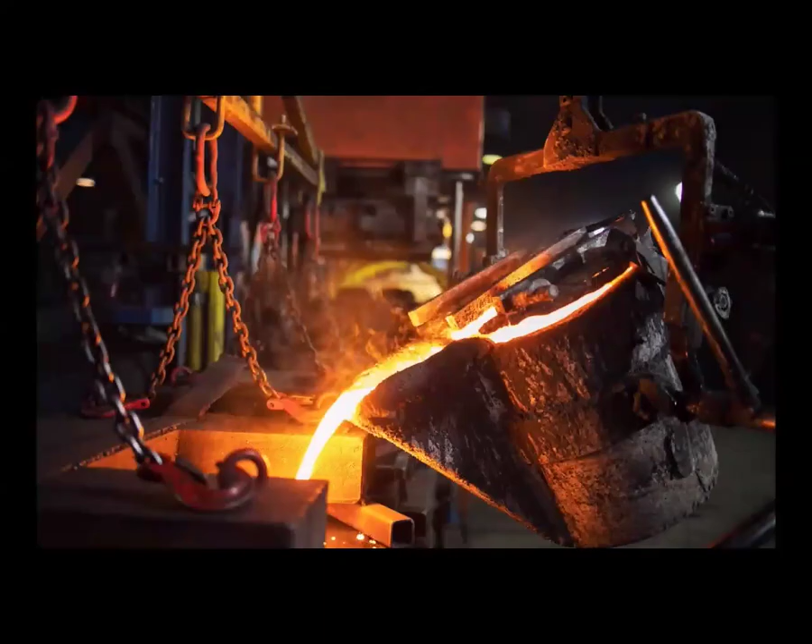Composer John Mackey writes in his foreword to his piece Foundry, quote, "The idea with Foundry was to make a piece that celebrates the fact that percussionists have the ability to make just about anything into an instrument. It won't end up surprising that Foundry for concert band with found percussion, much of it metallic, ends up sounding like a steel factory." Now, this spoke to the uniqueness that I see around me every day at South Dakota Mines.

Here at SDM, the students are extremely smart and driven, but they are also creative and deeply fascinated to learn how things are made and how things work. For our performance, I reached out to some of the classes and professional organizations on campus to see if they could help us create our instruments for this piece.

My first step was to go to our own South Dakota Mines foundry, which houses multiple STEAM groups, including blacksmithing, casting, and welding. The highlight of this experience is when the foundry hosted myself and all of our percussionists to forge our own triangles. None of our current percussionists are metallurgical majors, and so it was a new experience for all of us, learning how to bend and treat metal to produce functional and beautiful sounds.

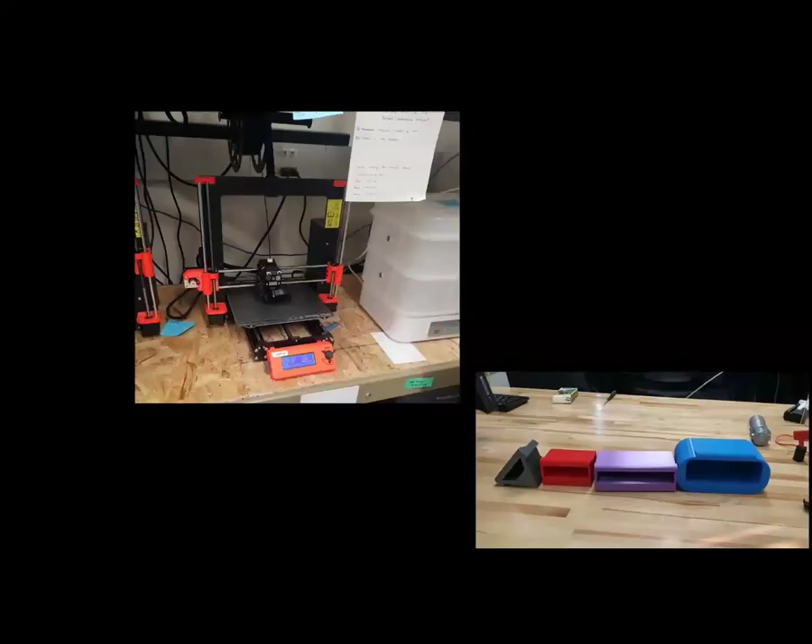We also had diverse teams design our PVC pipe marimba and our 3D printed wood blocks. They all have a love of art and design. Now, is some of this a bit over the top? Yes it is. But I'm so proud of these student-driven design projects, which helped our whole group think about music in new ways.

Similar to the way that continuing to be involved in music and the arts while studying STEM helps students think creatively and innovate new solutions to problems in STEM and problems in our society. Hopefully Mackey would appreciate our version of Foundry, and we hope you enjoy our performance.

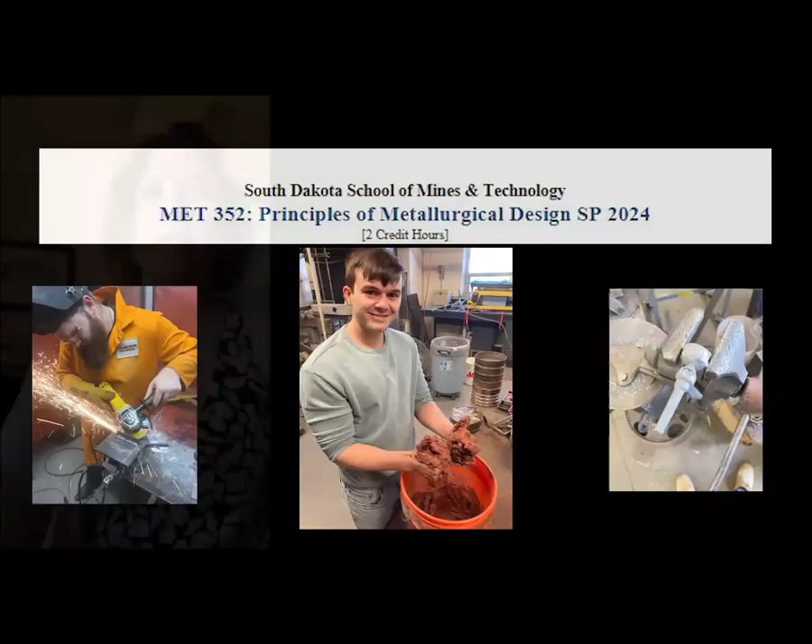At South Dakota Mines, we run on the motto, build it, break it, create it. A perfect example of this is from the spring 2024 Junior Principles of Metallurgical Design course. In this course, students are challenged to use system engineering principles, teamwork, project management skills, technical communications, and material and process selection as they relate to metallurgical engineering, and this semester, as they related to their customer, South Dakota Mines University Band.

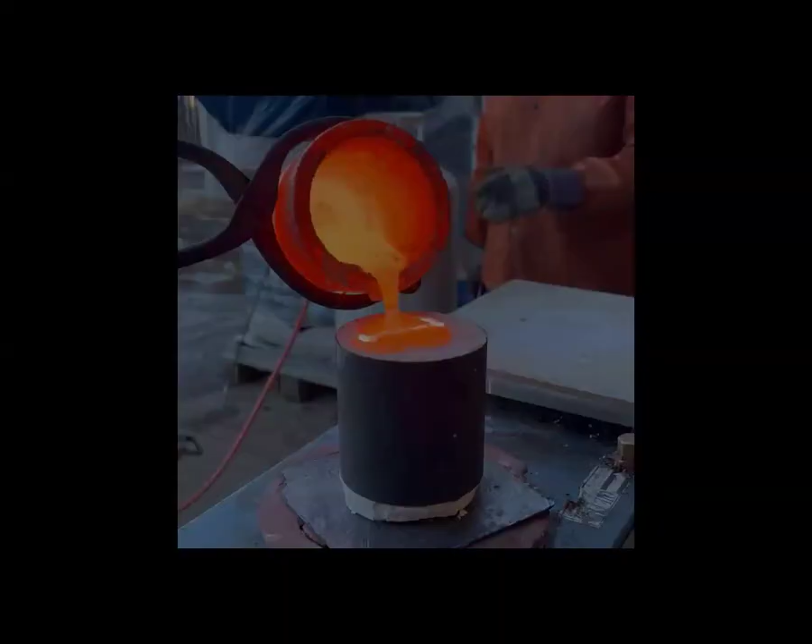5 teams set out to create new instruments for this performance in their assigned medium, either forging, casting, or ceramics. Guided by the faculty advisors, they needed to combine the art of design and creativity with the science of their materials and the methods to deliver a final product for our performance tonight.

There were 2 forging teams. One settled on creating a cymbal, and then the other on a set of chimes. There were 2 casting teams. One created a post horn, and then the other created a set of carillon bells. Then there was 1 ceramics team, and they created 2 traditional drums.

For each project, prototypes and molds were created and materials were tested. For the post horn team, they only used recycled materials. And for the ceramics drum team, they created their bowls out of Black Hills clay they gathered themselves off of Tower Road. Now, this project wasn't without its challenges. Air conditioners destroyed curing clay. Casted metal had a mind of its own.

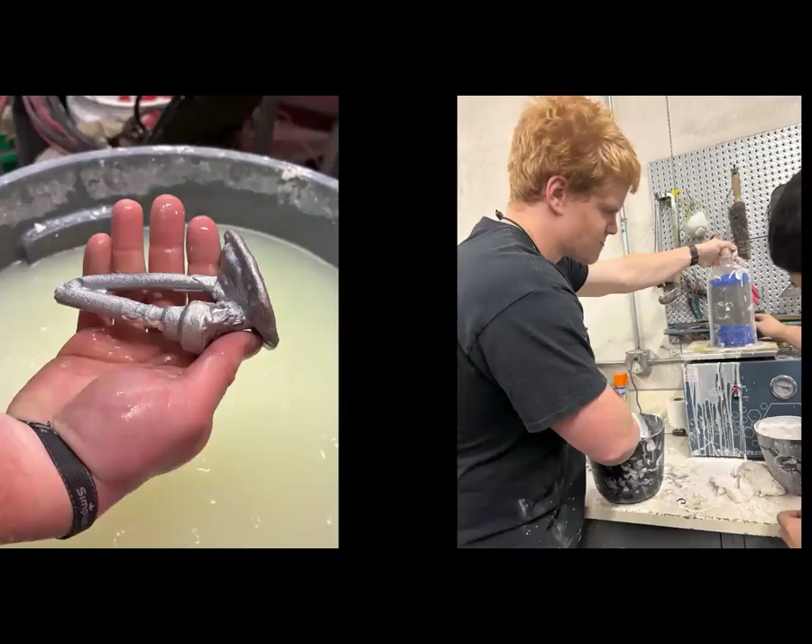And luckily, these students took their jobs seriously, testing materials, creating safe environments. We are happy to report that all teams were successful in creating a product that then was explored and manipulated by the musicians performing tonight. This was true teamwork from creator to performer. It is amazing what our students can accomplish, and we hope you enjoy hearing these new instruments on our performance of Randall Standridge's Celebration Tribalesque.

All right, so that was 2024, and then this spring, we did it again. So I'm going to turn it over to Dr. Donovan to talk about what happened this semester.

Thank you, Dr. Armstrong. And I think on her slide, she should have been much higher up there. She's a pretty key component of this. The students are always going in asking questions, so we're very fortunate that we've been able to work with her.

I might stand on that side. That seems less echoey. Is that less echo? No. Let's do that. Is that better? Awesome. Yeah, I couldn't have listened to me through that either.

Once again, thank you, Dr. Armstrong. We are really fortunate that we've been able to work with her the last 2 years. It's been so fun, and the students have had the opportunity to have a different perspective looking at a problem. And I really wanted to shout out all the different instruments we've made this year. I don't have the time to talk about all of them. I'm going to be talking about 2: the ceramic flute and then the glockenspiel, but there were a lot of really cool projects that the students did, and I'll dive right in.

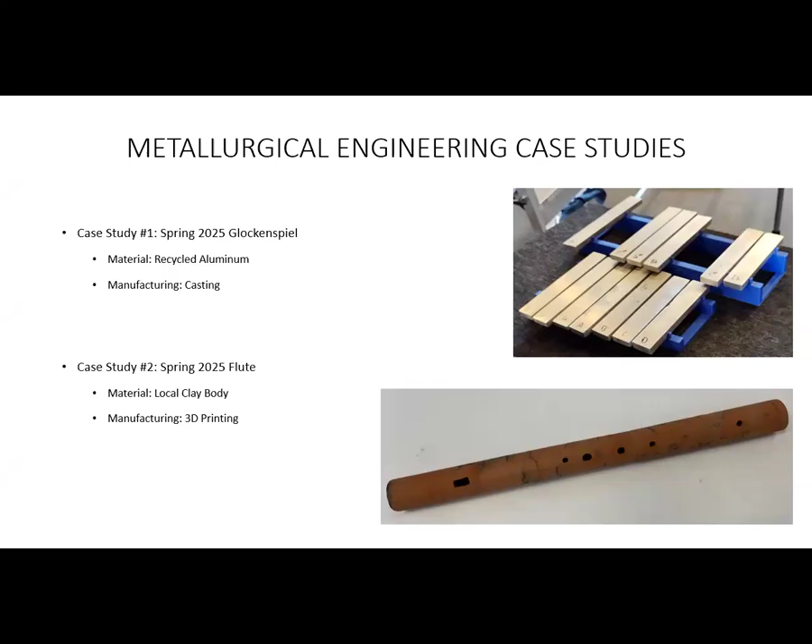So when we start with the design project in metallurgical design, we start with a problem statement. This first one we'll do is the glockenspiel. The problem statement is similar, if you're more familiar with science, to a research hypothesis. In engineering, we start with a problem statement. Engineers, we're problem solvers, so defining the problem or what we're going to do is really where we start, and that's what this group did.

So the glockenspiel is actually this one right here. They designed and produced 13 glockenspiel keys. They went through a casting process, and then there were a couple different songs this year they could design their instrument to align with. This one specifically went with Roma, and there were 13 keys that they made. As you notice, there's not 13 keys. The other half of it's in a display.

I should also say, as I go through these slides, you might start noticing there's 2 different slide decks. It's because these are all student slides that I'm presenting. So you'll be as surprised as I am with each slide. No, but I really wanted to shout out the students. These are all student slides. I didn't modify them. I'm just helping tell their story.

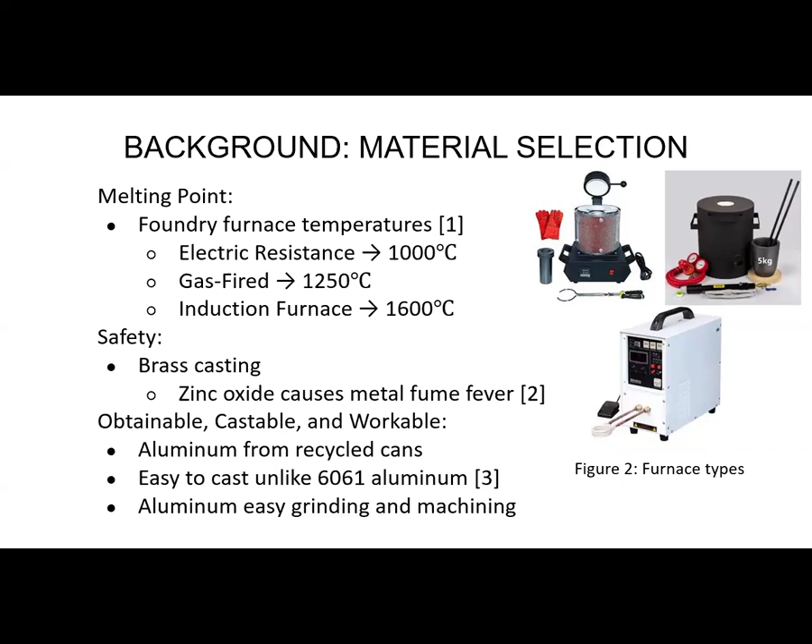The aluminum they used is from recycled cans. Of course, I joked, college students, recycled cans. If it was my era, it would have been one type of soda cans. I was very surprised. I went and looked at the cans they had. These kids are Monster drinkers. These are energy drinks. There was a lot of Monster cans that went into the making of those glockenspiels. But they stuck with the same can design throughout, melted them down for this. So just some considerations they had during this process.

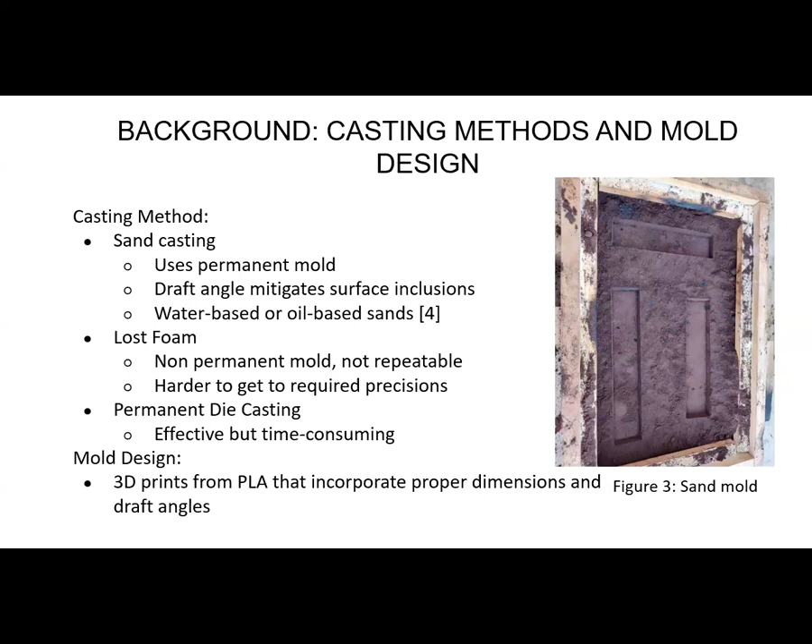The construction for this, they're rectangular bars, as you can see right there, generally made from steel. Steel has a higher melting point than aluminum. In aluminum, we really wanted to keep this recycled sustainability component, so they stuck with aluminum, but could learn from what was done with steel here. And then the harmonics, I'll get into those a little bit later, but they wanted to keep those in mind.

So frequency is directly proportional to the thickness, and then it has an inverse squared relationship with the length. So if you want to change sound, and we'll get a little bit more specific, you can either trim off the edges or trim through the thickness of it. And by trim, I mean grind down.

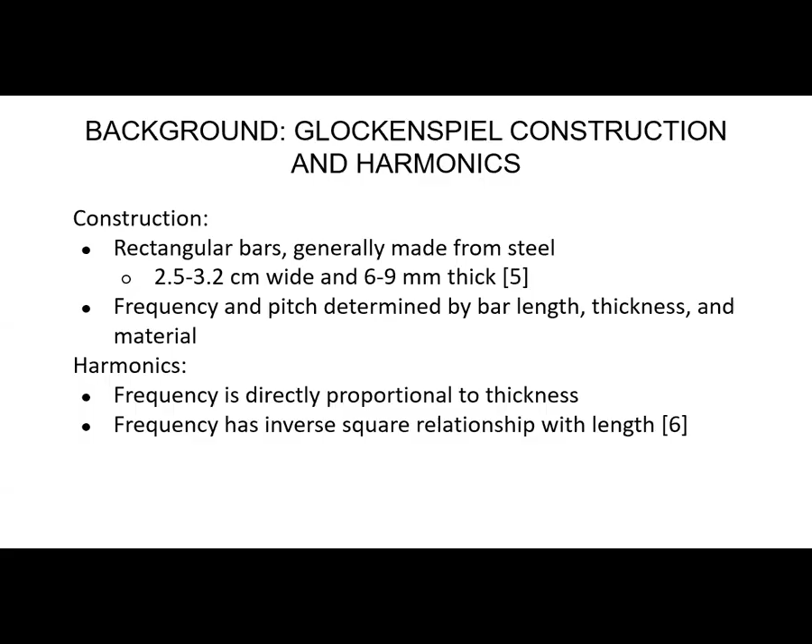So here's design requirements. This is a really important part of design, is being very specific on what our customer needs. So in this case, their requirement was the ability to tune keys. They selected 13 keys, that was their goal. Must be loud enough to be heard by the audience. It's kind of important. If we can play it and only I can hear it, it's not a very useful instrument for Dr. Armstrong. Bars must be machinable.

That's a big one. When we're doing a lot of casting, there's often what we call post-processing. So it's not like it comes out perfect. We have to do things afterwards to get it to an appealing look, or maybe even to get to the sound we want. So the machinability is a very important part. And then the other requirement was it must be able to be played by a percussionist. Once again, if the percussionist can't play it, it's not very useful for Dr. Armstrong.

One other thing we really walk through with the students is we as humans might have gut feeling. Gut feeling is not very quantitative. As engineers, we try and quantify that as much as possible. So here, what we have is what we call a trade study. We'll just stick with table 2. You can read the bottom one, but I'll walk through a table 2 example. It's the casting method trade study. So they have the different types: sand casting, investment, lost foam casting, permanent die casting. And then they looked at a variety of different things: porosity, impurities, mold design, repeatability, cycle time, post-processing.

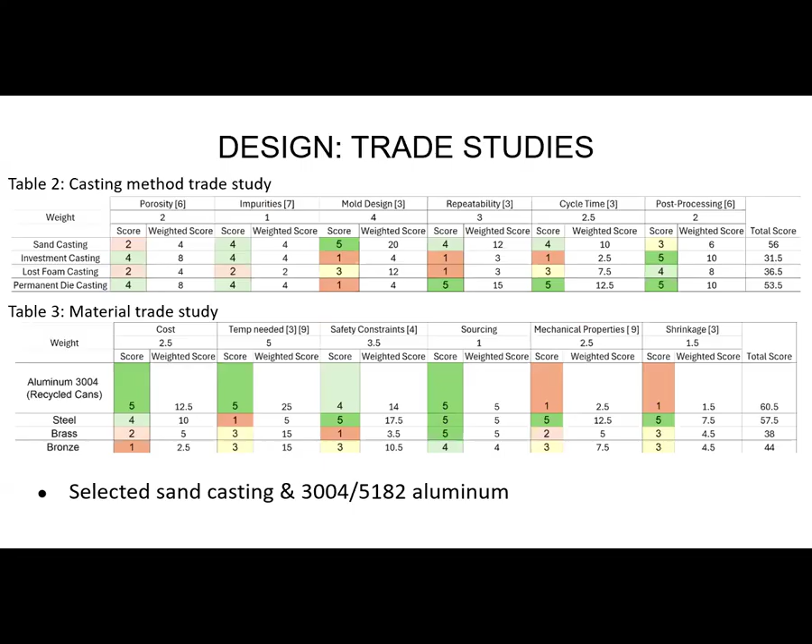Another framework we give students is a flow. Where are we starting? Where are we going? I think one of the most important parts of engineering is that feedback loop, and you can see a couple different ones here.

With this particular one, they started here with the CAD pattern design, and they worked left to right. And when we got to the sand mold construction, they did a melting and cast. So they melted their metal, casted it. They had a bad cast. They needed to go back and redo that. If it was fine, we went to machining, and then did testing and tuning.

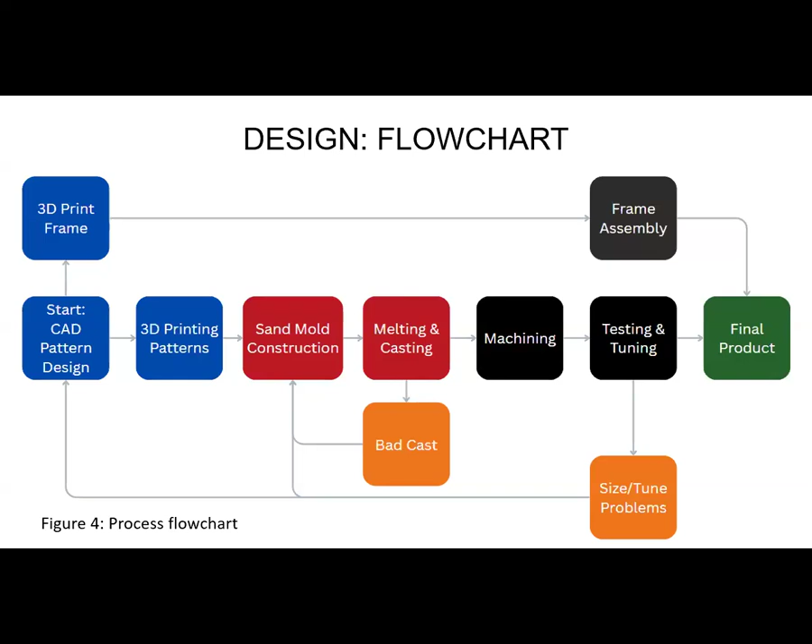With the testing and tuning, if it wasn't the way we wanted it or needed it, we might have gone back to the sand mold construction, or we might have tuned it and put it back in. But as you can see, there are these different loops in the process, and we'll show you some examples of those. Once we got past that, you get to the final product. For the tuning and testing, they often use a lot of different apps, either on your phone or Dr. Armstrong had ones they could use.

Safety, I kind of talked about that a little bit earlier. We pulled these slides, they didn't come through clean. This says design safety. Some of the things to keep in mind: molten metals. The molten metals they were dealing with were above 600 degrees Celsius, so they're quite warm. We have flammable gases that we need to consider, hot tools, and then also toxic gases if you're working with like brass, so zinc can come off, lead, those are all issues. They didn't have that, they were working with an aluminum, but as you can see, they're still in PPE, personal protective equipment, and they're not having any fun.

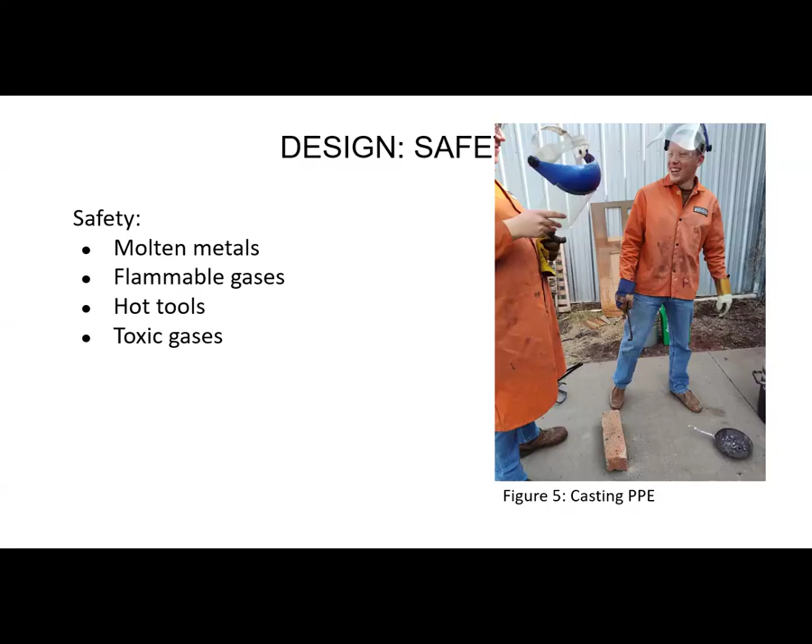They were totally miserable, not having any fun at all. No, I think the funnest part was just to see the groups get together and really get to interact in a hands-on way. So they had a good time with a lot of these. There were struggles, but definitely had a good time along the way.

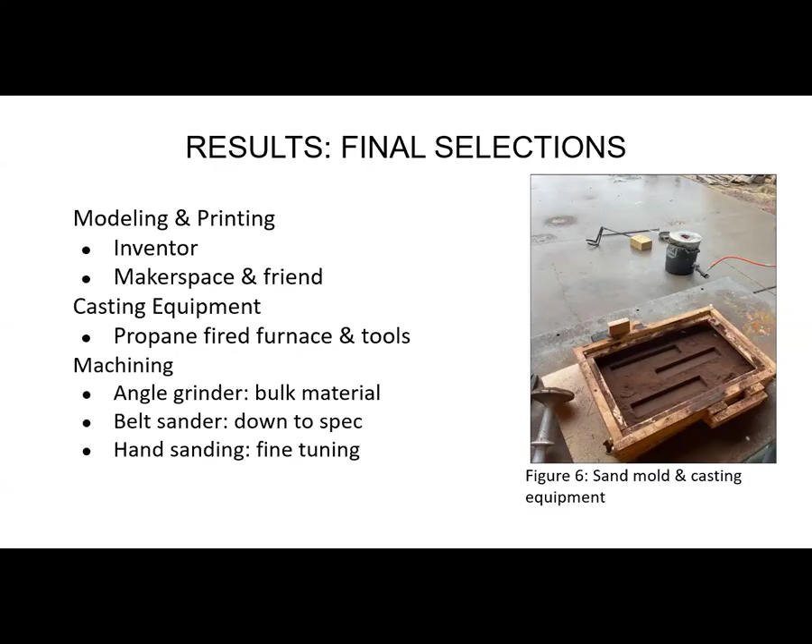In terms of the tuning, I kind of talked about this a little bit. There's a couple different tuning apps. Dr. Armstrong has equipment you can use as well to tune. But for the glockenspiel, this is actually, I think, modified off of a xylophone, a very similar instrument, which was where this literature came from. But you can see here, if we remove material from this end or this end, it will sharpen both the fundamental and the overtone. And then if we remove from the middle, so not shaving off the sides, but from that more center, it will flatten out the fundamental note.

So what that means, lower thickness, lower tune, lower length, higher tune. And so the students were able to do 13 different notes with this and get within 3 cents accuracy. So I'm told that's really impressive.

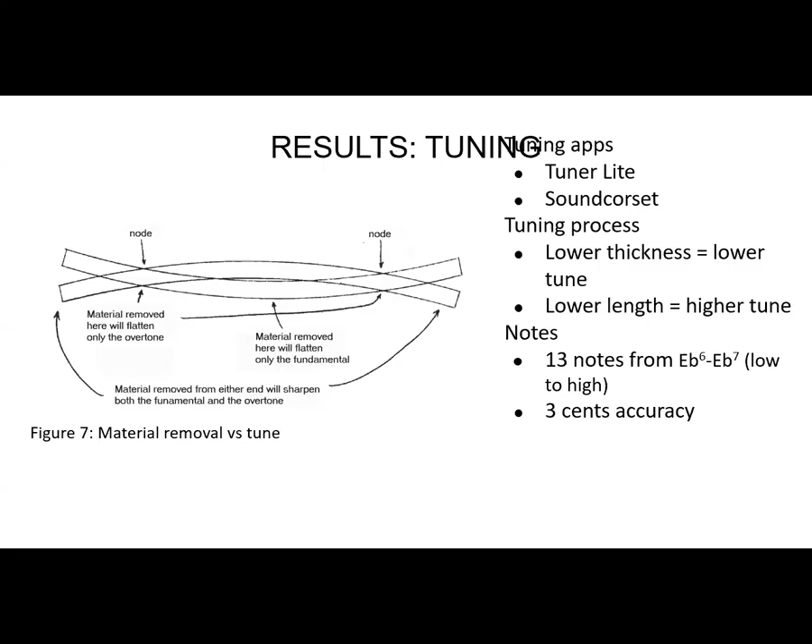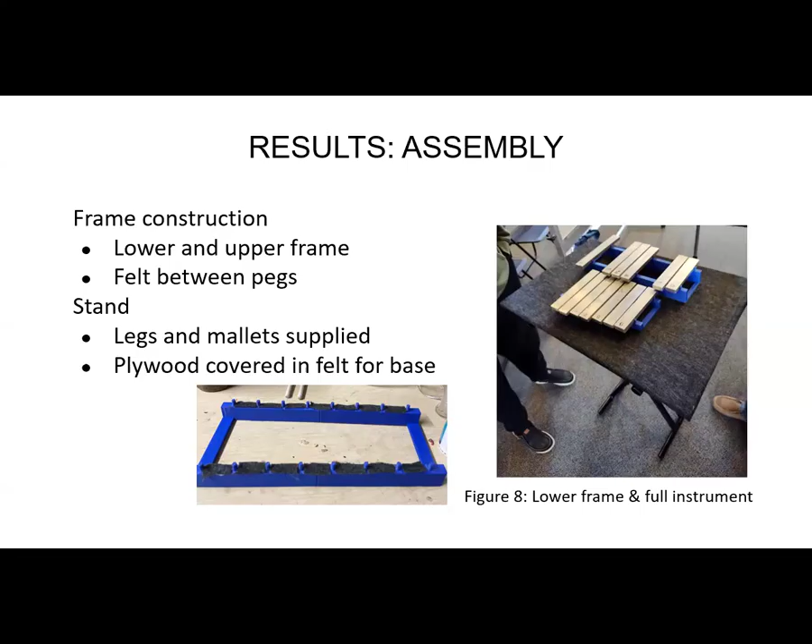One of the big parts of this is, for example, I'll pick on this gong. I know I'm not talking about the gong, but it's probably easy to make a gong, but that's not good enough. If we just hand Dr. Armstrong a gong, she's then got to build a stand for it. So part of it is it's not just making it, it's making it functional and useful and actually helping that whole process. So making it wasn't sufficient. It had to be made and functional to completeness, so we could hand it off.

So some results are the property tests that we did. So for this group, they did 4 different tests. They went and looked at composition. So they used X-ray fluorescence to do that, and that's what we see here. So a big portion of their aluminum was, as you'd imagine, aluminum. It was 90%. But you can see some other things in there, some magnesium, a little bit of copper. But for the most part, it's aluminum as we anticipated with using an aluminum can. And then we did see a slightly high silicon content and then just some references they had.

They also did hardness testing on these, so Rockwell B test, and they got 59.4 and 48.2. I think in a slide or two, I'll talk about that. And those, we were really looking at mallet strike zones. So there's different parts that the mallet hits as well.

They also did a drop test. So if they drop it, we don't want it to shatter. Not that we'd worry about that with metal; we did have other instruments where that was a concern. But they did drop it from 5 feet high, and they only got a small dent. So even if something happened during transport, we were probably okay.

Porosity, that was a huge one that the students wanted to go and investigate. We have creative students, but we also have curious students. And so with the porosity, I remember this group really wanted to go and investigate that. And part of design is, we've got a product. That's a great question for a scientist or maybe a summer project, but they did a really good job on really asking a lot of good questions and identifying things that could be fixed in the future.

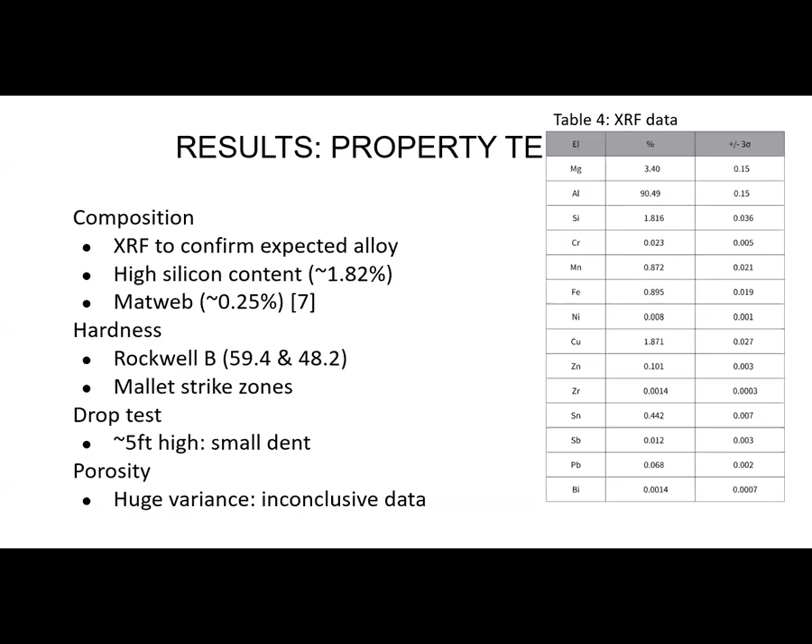Part of being an engineer and solving a problem is also saying, how can I improve upon problems that exist? So they really wanted to dive into that. We calmed them down a little bit, but it was kind of a fun path they almost went on. Some challenges they really did have: broken bars, that's pretty common sometimes with a cast.

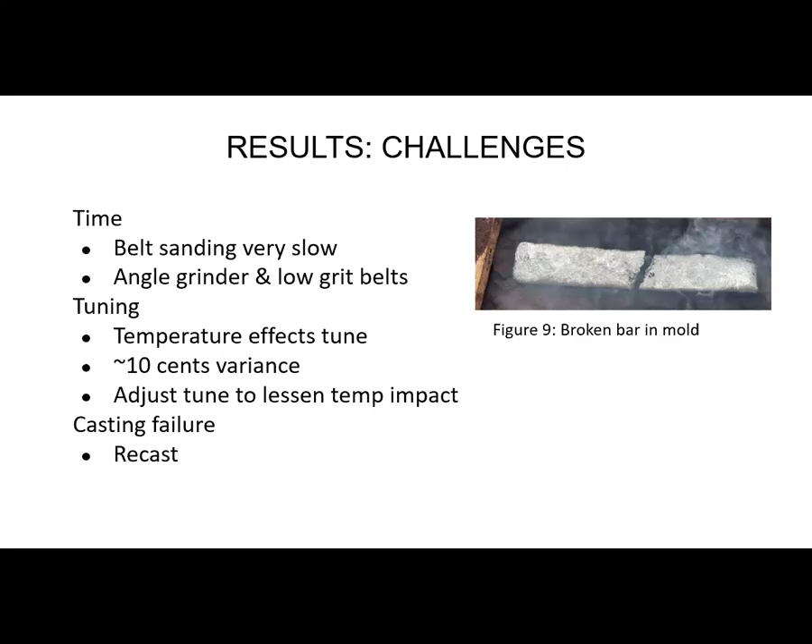Time: the belt sanding was a very slow process for them, as well as the angle grinding and the low grit belts. And then tuning: we see temperature affects the tune. We saw a 10-cent variance, and then they had to work on adjusting the tune. And then, like with this one, there were a couple recasts they had to do. So 13 keys was pretty ambitious.

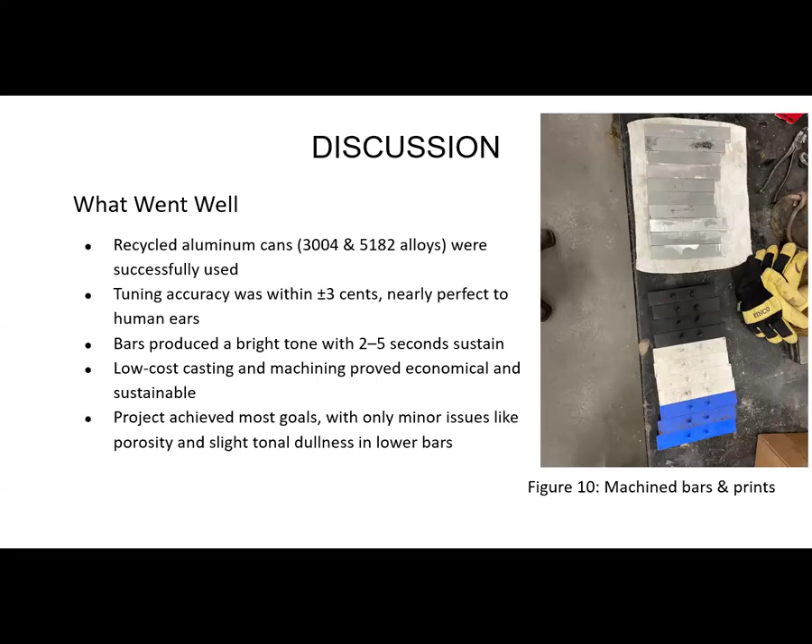I'm just going to go through this at a high level. They went through some discussion about different recycled cans, tuning, and then the different tones the bars could produce. And one of the big things a lot of these teams kept in mind was low-cost casting and machining, so what's around that we can already use in a sustainable way. And some recommendations. I'm not going to go through all of them, but that is another thing as an engineer: what is that next thing we can improve upon for that next cycle?

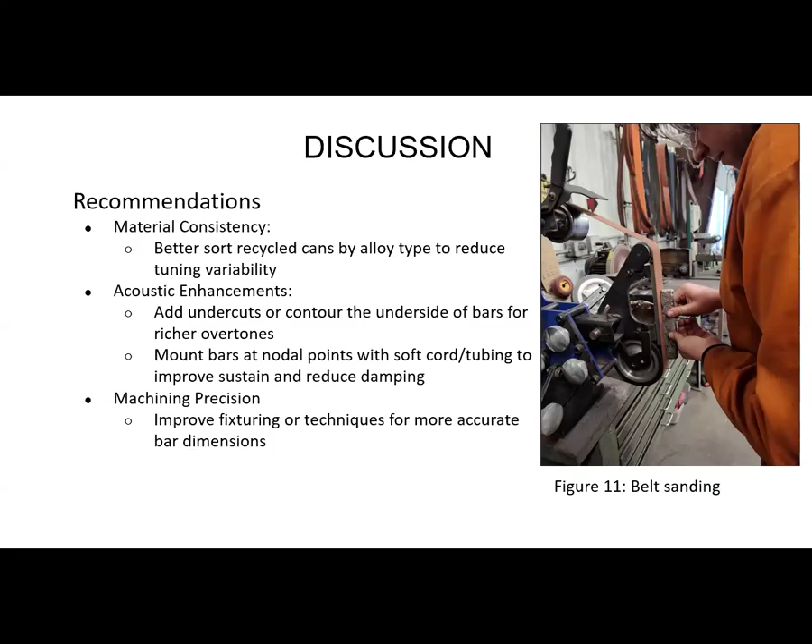To be clear, this is a lot. We give them 15 weeks in a semester, and part of that is just learning engineering design, getting these terms: what is a problem statement, a constraint. There's all of this in this whole time. Some of the students have never cast before, so they're learning this whole manufacturing process. And we're grateful we have Dr. Armstrong, but we're also learning music a little bit along the way too. So there's a lot of moving parts in there.

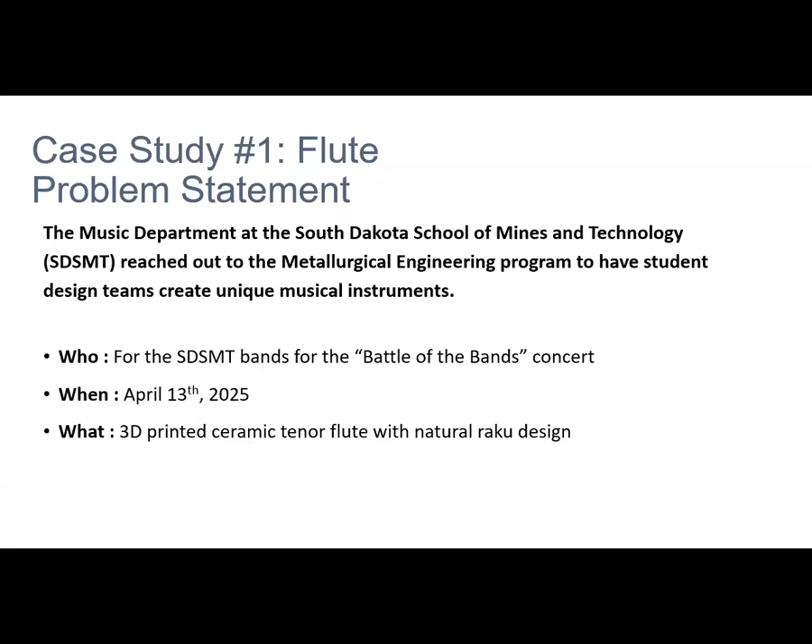The next one I'm going to jump to is the flute. They also start out with that problem statement. We like to identify who, when, what, and they also have the requirements and then also some restrictions. Restrictions, like I said, you can think of as constraints. I'm going to go through some of the traditional engineering stuff a little faster because I talked about it already. But this group was with the flute, which is right there. I guess I should have you play it, huh?

So this group, they made a flute. They also made the mutes that you might see. Almost. It is a weird mouthpiece. It was the first 3D printed one we had with clay. So it's kind of... yeah, there's a mouth. We did add a piece to the mouth part of that to help it.

But they started with 100% local minerals. So they went to a place, it's our little hidey spot, where we found a pretty good clay body that works geologically. So they had to mine it. They then took it and dried it. They went through a grinding and a sizing process. They did what's called XRD.

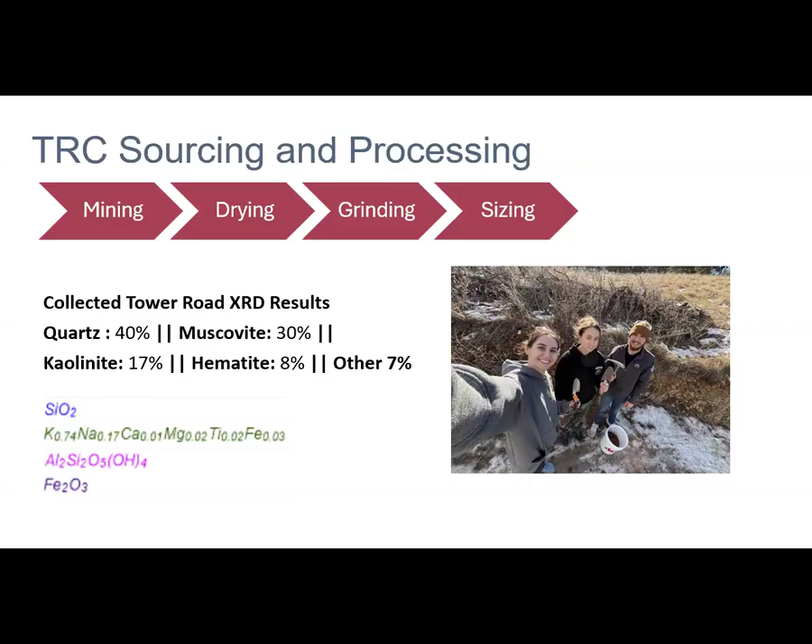So XRD is X-ray diffraction. You can take a mineral, hit it with an X-ray, and the way it diffracts can give you information about what minerals are in there. And it'll also show you, like here with quartz, the percentage of them. So from XRD, they could formulate a clay body that they could then 3D print. And here's their flow chart.

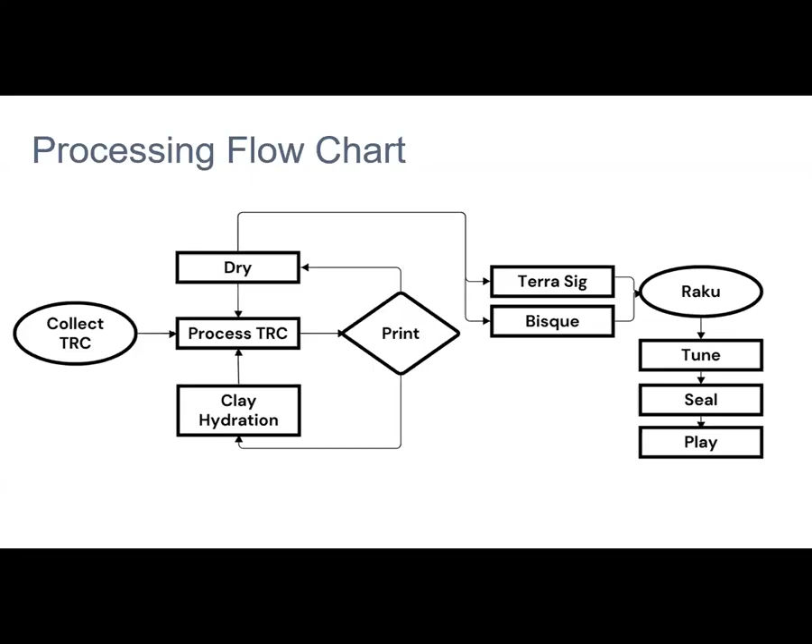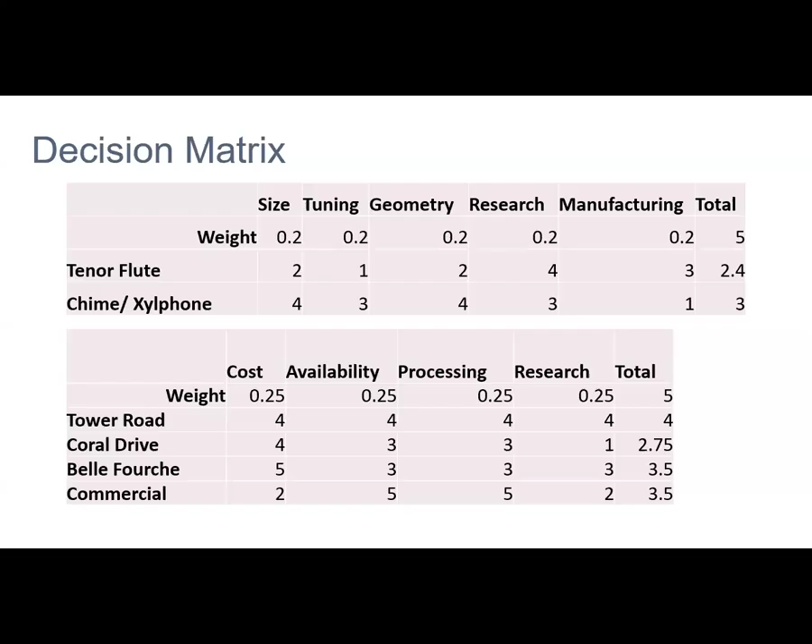Here's their decision matrix. A couple things they looked at was the tenor flute, or a chime, or a xylophone. We had 3 glockenspiels like that for this group, so I think part of their design choice was not being like everybody else, and then a couple different clay bodies that they looked at that are in the area.

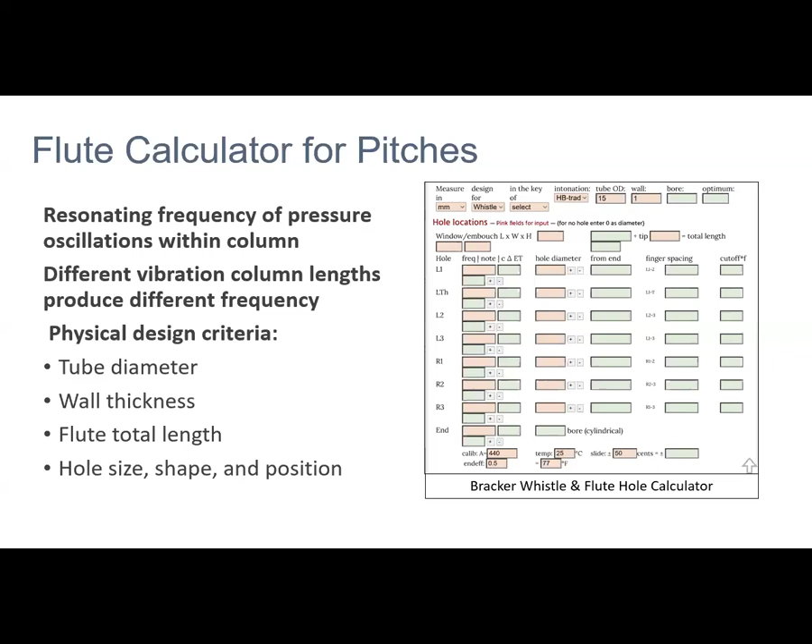For this one, they really had to dive in for a flute calculator. And so this was from the Bracker whistle and flute hole calculator. So they wanted to look at resonating frequency of pressure oscillations within a column. And then we had to keep in mind different vibrations, column lengths, different frequencies. And then some other physical criteria they had to look at was tube diameter, wall thickness, flute total length, and then hole size, shape, and position. And those are all different things they could put into this, and it would help guide where they should be putting the different pieces. And actually, I think because of the limiting size of our 3D printer, they had to actually print this in 2 segments at one point.

Just do a quick raise of hands. Who here has a polymer 3D printer? Okay, a couple of you. The unique thing about a polymer one is you can pick it up and move it everywhere. This one, it's either on and going, or there's no stopping it. So there's no picking up. So they really had to think through the 3D printing design part because there isn't a stop or a pause per se in that. The other thing they did is they did do a series of different flute tubes that they worked on, but they also did some different testing as well.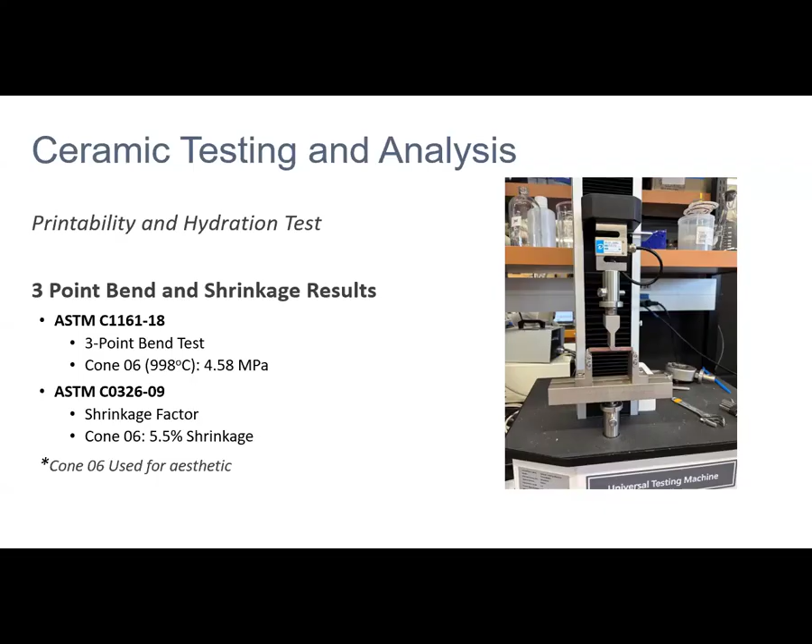So this is an example of a 3-point bend test. It's just a very long rectangle, a 3-dimensional one, and then they're applying a load here on it. So you can see the 3 different points, that's where it gets its name. This piece was fired to a low cone fire, about 1,000 degrees Celsius. They also did a measurement for a shrinkage factor. That's another thing to think about. If they're 3D printing, we just talked about how important the flute diameter is for a lot of the fingerings. They had to think about shrinkage factor for that. So they also used that ASTM as well.

Here's also some of the printing. You can see some fun challenges they had along the way. So they had air pockets that would tear holes and dimples and things. They had a clogged nozzle. They call this an elephant's foot. It caused some challenges there. And then just setting it up, there's a lot of weight on that clay. And so that was its own challenge with warping and partial collapse.

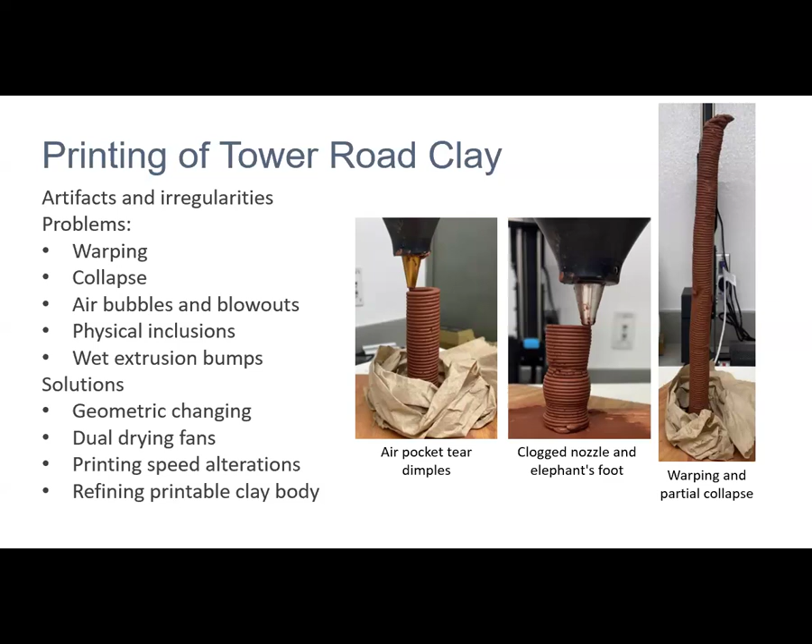I think at one point it was named the Tower of Pisa because we had some printing challenges there. As you can see here, it was a little bit leaning. So a lot of different things they did to work through that. Geometry changes, drying fans. Can we have this dry and stiffen up while we're printing the rest of this? So they ran into a lot of challenges.

I asked the students if they saw how I handle parenting with the duct tape and against the wall.

No, I'm just kidding. They're like, it did work really well. So that's actually one of their ways of, they did have some challenges with that slumping on the side, but they were able to tape it to the wall and that really helped support it. So for all methods, it was necessary to cover the tubes for drying and cracking. So you did have different rates of drying as well as these were being printed as they changed that.

Hole manufacturing, they did a lot of different things to get to the holes. This is just a flat 3D printed piece, and they really wanted some high resolution. So this was a laser engraver. It took a long time to get the one and only hole they had, and they're like, that's not gonna work very well for us.

Another option was pre-cut, so leather hard. You can have shrinkage compensations. They were able to have some shrinkage compensations, so I think they ended up going kind of a little bit between these two with the subtractive bisque drilling as well. So they were able to cut these out before they fired it.

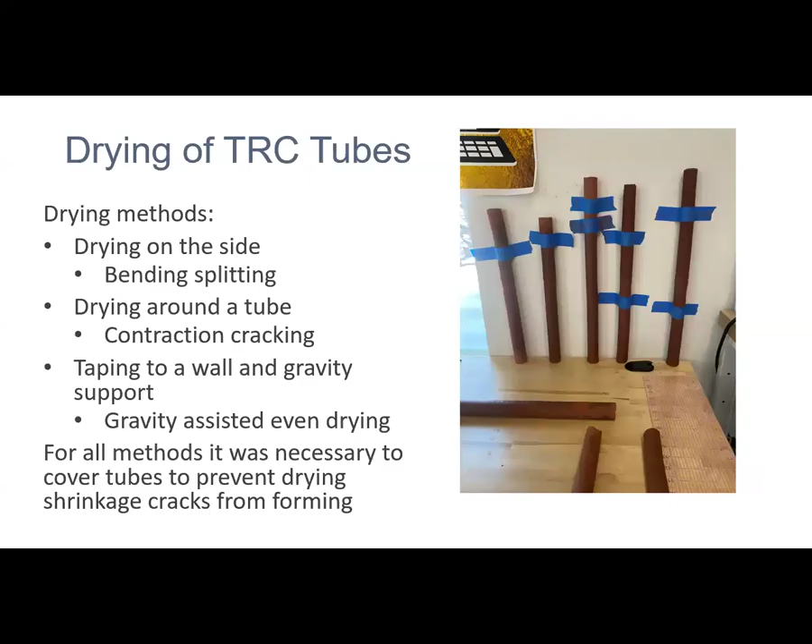I don't want to spend too much time on this. They did a formulation. It's a slurry, and they used a deflocculant, and it was to help the silicates stay suspended and the heavy oxides to sink, and they applied this to the surface, and it helped give it a leathery surface, the idea being better diffusion for the charred carbon in the ceramic surface. So they were prepping it for that raku firing.

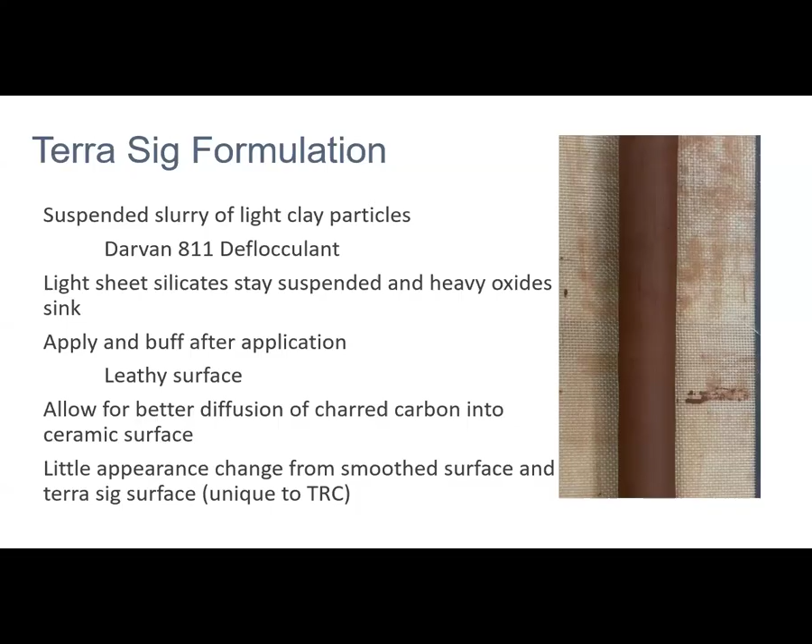And so what he was going to do is he did a firing with that terra sig, and then he removed it from the kiln and put it in these metal containers, waited a minute, and then applied the horsehair and pheasant feathers. So a lot of times, if other people have seen raku, it's usually a lot of organic material, grass, straw, feathers, all these sorts of things, but it gives really cool designs on the clay body itself.

For this, they used actually horsehair and pheasant feathers. They went out and found those. Once again, proper PPE was used for that.

They also had some recommendations. That's usually a common part of design, and kind of wraps up the two different design processes. I know I kind of flew through those.

Do you want to do it? Or? Let's do questions now and then. Yeah. So thank you guys very much for your time. I think we're going to open it up to questions at this point. Sure. I'll try and do that without feedback. Okay, so, kind of loud.